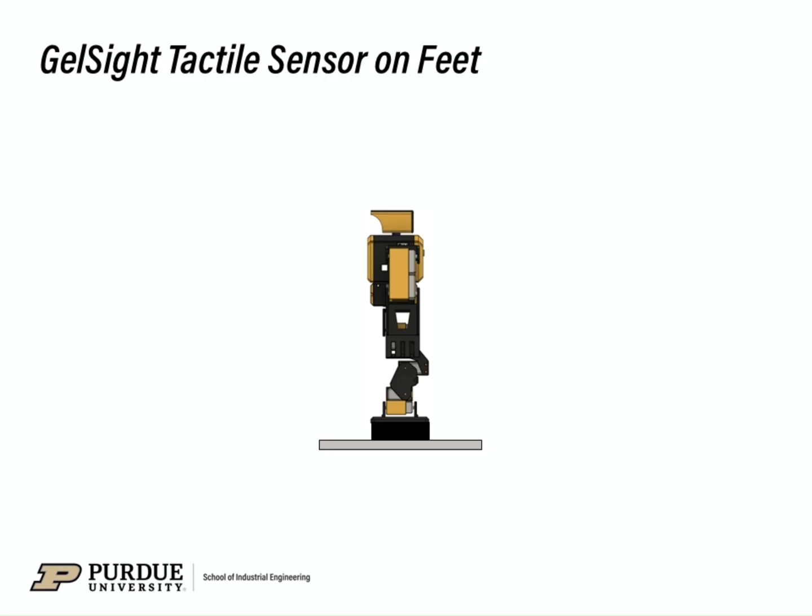In this project, we proposed to attach a tactile sensor to a biped robot's foot so that it could use the perceived center of pressure to aid its balancing, as well as other functionalities that come with having a vision-based tactile sensor. We incorporated a GelSight sensor on the foot of a bipedal robot to achieve the desired functionalities.

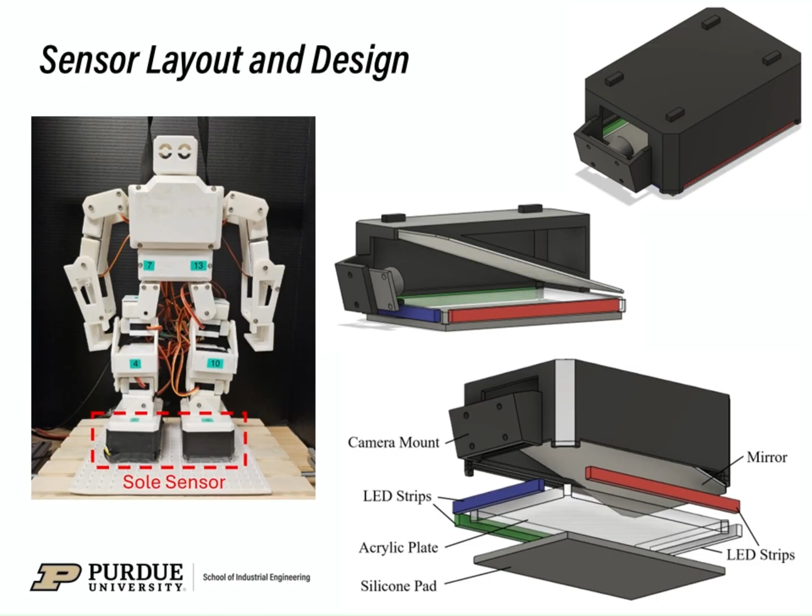Incorporating markers allowed us to detect shear forces, which could be applied to detect slippage for later applications.

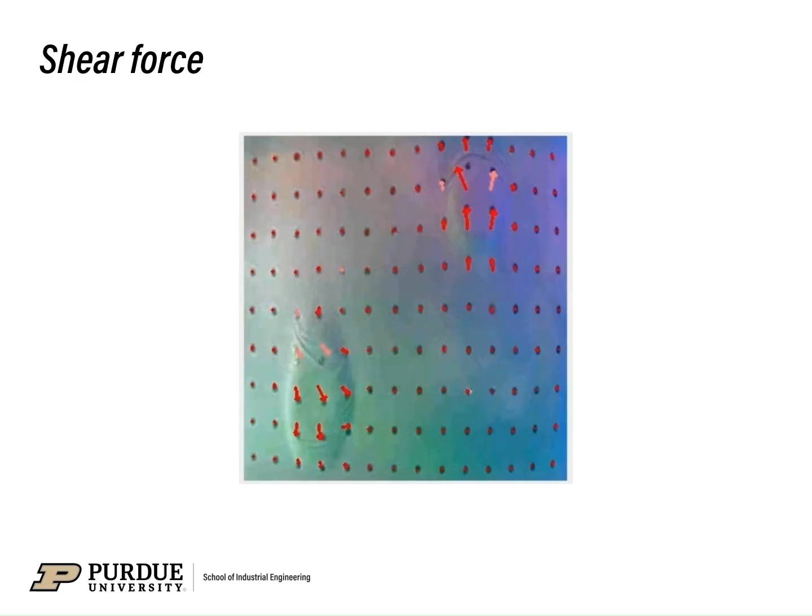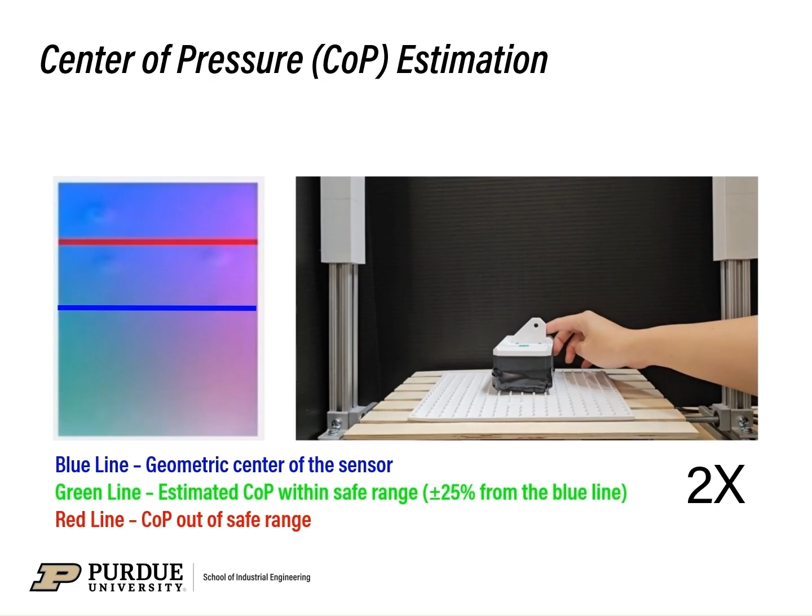We estimated the center of pressure on the sensor by detecting blobs present in the collected images. The average value from the coordinates of detected contours were used to create the moving line displayed over the sensor image. The practicality of the estimated center of pressure was tested by placing the robot on a motorized rotating platform.

In the top row, the robot's motors are powered to stay stiff, but no feedback was given to turn the motors. In the bottom row, the robot's ankles were turned with a value given from a PID controller to minimize the error between the geometric center of the sensor and the estimated center of pressure.

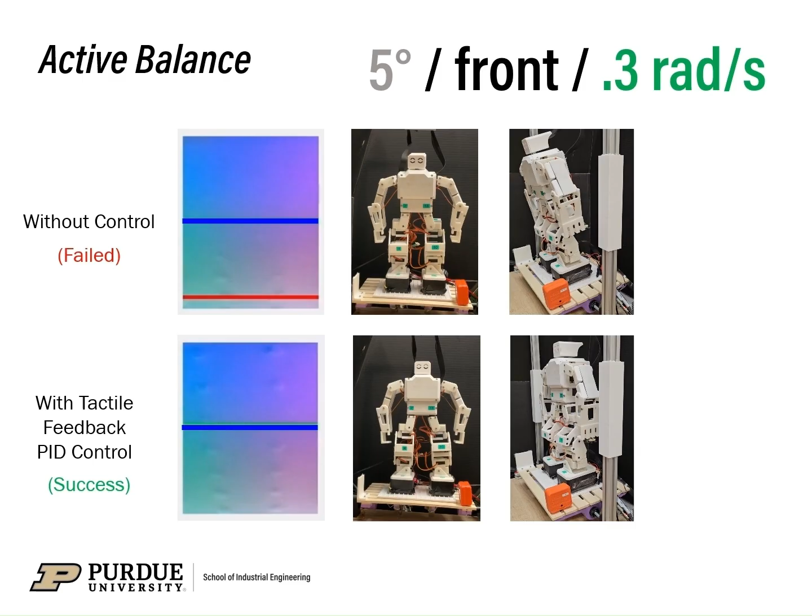The experiments were done over varying angles of the rotating platform, both inclining and declining.

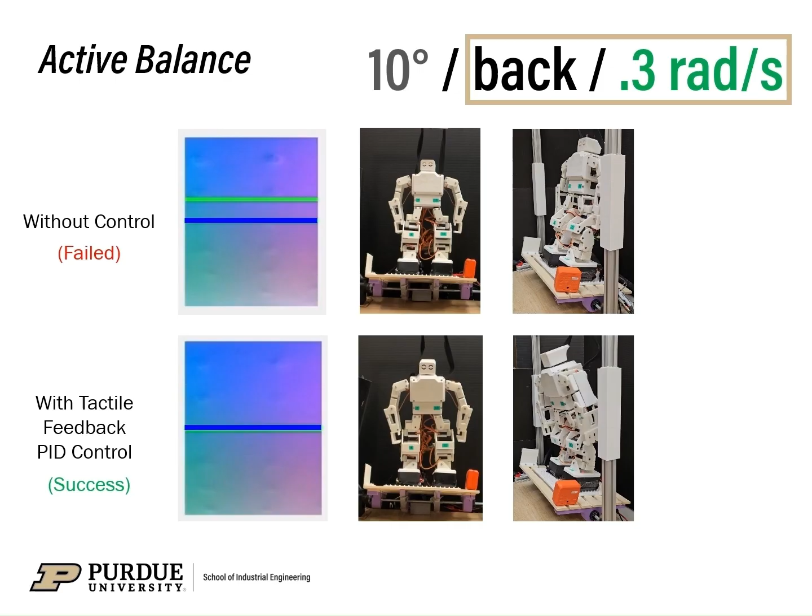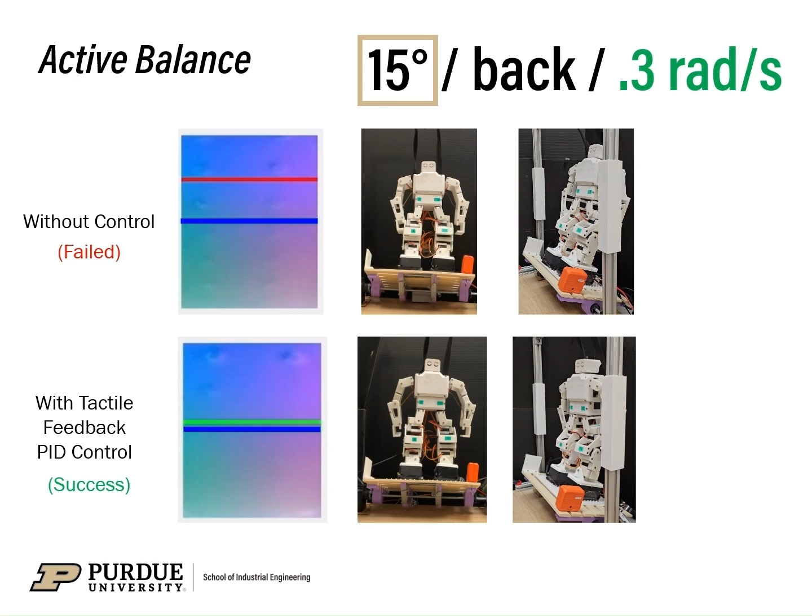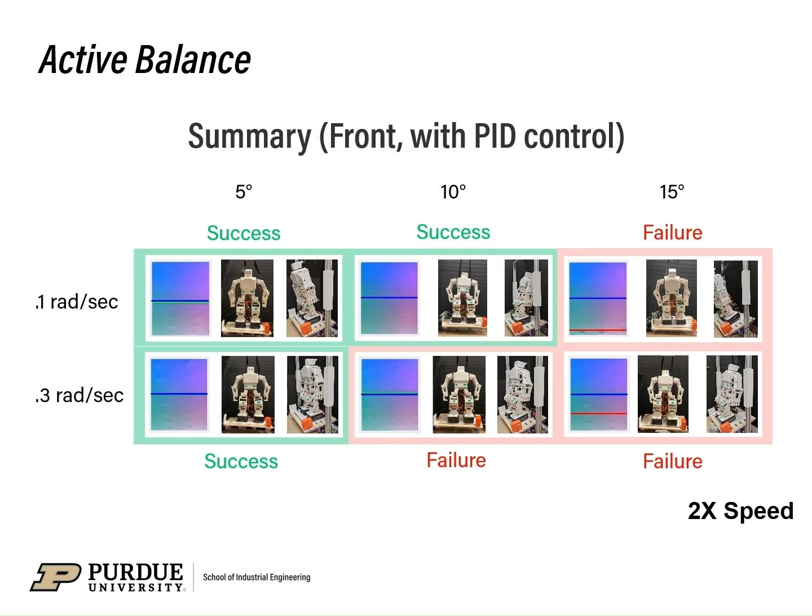The red background indicates incidents where either the robot failed to recover balance or had to be stopped by the harness to prevent a fall. In the following experiment, we tested our sensor's ability to detect the terrain while the robot was walking.

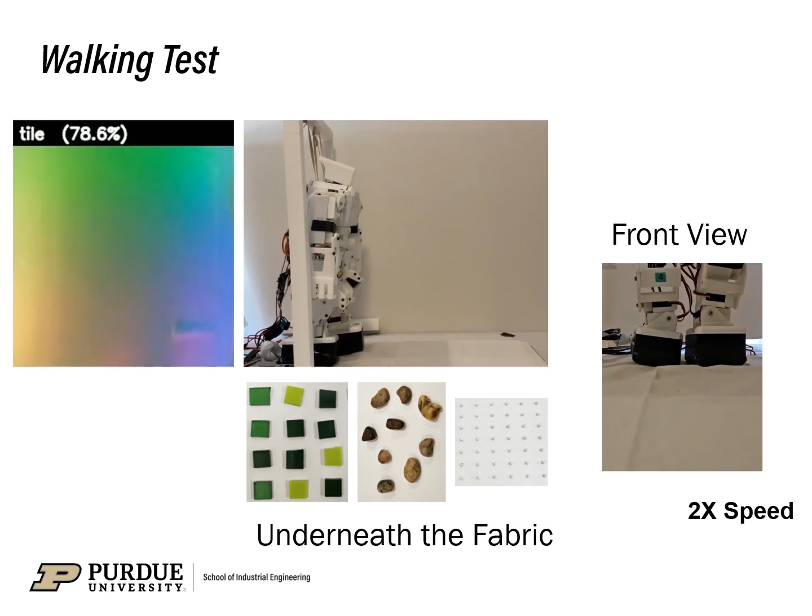The field was covered with a white fabric, so the type of terrain was not visible. The detection model was trained with ResNet50 as the backbone. The image below the robot's video reveals what's under the fabric for reference. The text on top of the sensor image denotes the terrain with highest confidence and its confidence percentage.